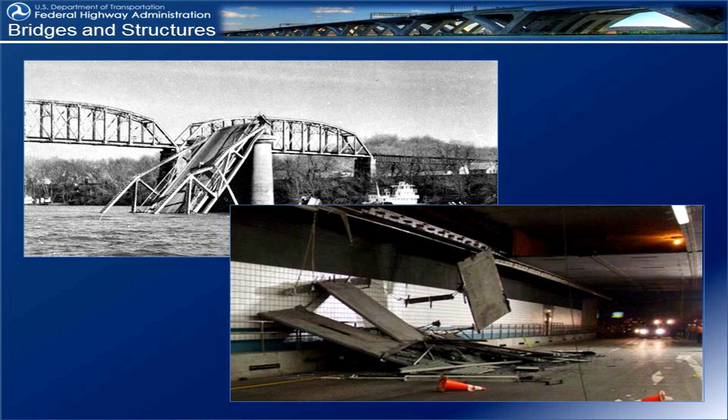But got us here with the bridge and tunnel inspection program Tom talked about: the Silver Bridge, 1967. This bridge collapse happened over the Ohio River. This is what really was the springboard for us to develop a national bridge inspection standards program, national bridge inspection program. But that wasn't the only thing. We tend to learn from our mistakes. We tend to learn from not mistakes, but from our events, things that happen.

1983, Mianus River -- a whole focus on what we call fracture critical today. 1987, bridge in New York, Schoharie Creek. We may hear Dave Henderson talk about that as well, and we talk about scour later today.

But certainly things that do happen, we tend to be very reactionary in how we do things. And part of what I'm going to talk about today is how we can become proactive, get to a little bit more on being proactive. But that was the bridge side. On the tunnel side, we've had those as well. I mean, I know there was an event that probably didn't springboard us into tunnel inspection standards.

But out here on the West Coast, you have the Dennis Edwards Tunnel. 1999, part of the ceiling in that tunnel collapsed, killed Dennis Edwards, who that tunnel was named after a few years later. But what really got us to where we are today with tunnel inspection, and the reaction, was certainly what happened in Boston in 2006 with that tunnel ceiling failure. And unfortunately, individuals died in that event as well.

But these are things in our past that help us move forward. These are the events that led us here today to where we are in doing this. We've been doing bridge inspection for over 45 years. It was the early 70s when the first national program was put together. And it's still going on today, and we're still learning as we move forward. Are we complete with all the challenges that affect bridge inspection? Absolutely not. And I'm going to focus on the challenges that still lie ahead of us.

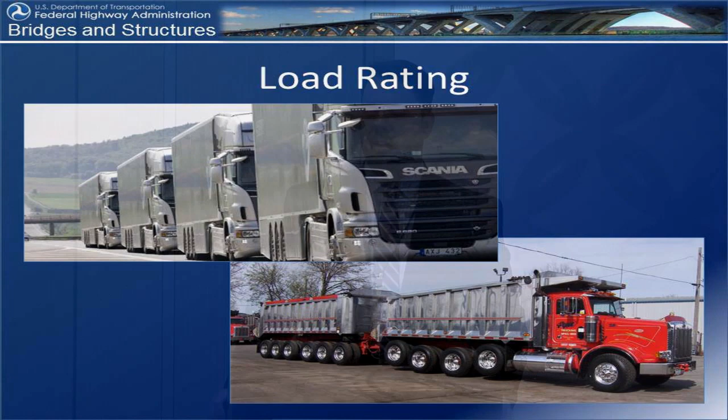But with vehicle-to-vehicle infrastructure technology coming, these vehicles are going to be able to communicate with each other, and they're going to be like cars running around on a NASCAR track, racing around an oval. Are we prepared that an 80,000-pound vehicle now is 320,000 pounds on the bridge all at one time, with another 320,000 pounds right in the adjacent lane, and another 320,000 pounds in that adjacent lane?

I was at a freight conference in Philadelphia back in the fall, and I raised this question: have you considered what this is going to do to the infrastructure, and can the infrastructure handle it? I'm biased towards bridges and tunnels, yes, but I was also speaking on pavements. And the person leading the conference said, no, we never even considered it. We're not considering it.

The rest of the industry takes it for granted that our bridges are safe because we keep them open. Safe bridges are open, unsafe bridges are closed. I agree, exactly Tom, it's what we say all the time.

But we're going to start putting loads on these bridges. Are they going to remain open? Are we going to start load posting more of them and preventing this from happening? I know there's been a lot going on in the last year and a half ever since the FAST Act passed. Congress put 2 vehicles in particular in the FAST Act that are causing us challenges.

One, I know a lot of states have been engaged in - my office asked you to develop a plan on how you're going to load rate emergency vehicles. These aren't heavy vehicles, much heavier than you're dealing with, but they are compact, and they have some pretty heavy axle weights that on a small bridge in particular are going to be very challenging, with 86,000-pound emergency vehicles driving around with the weights that are in law.

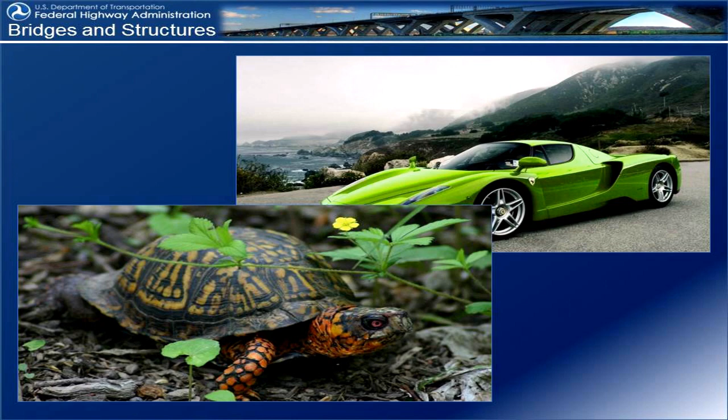Technology is going to come at us whether we want it to or not. And as government agencies, we tend to be the turtle. We are not quick to react to allow technology to help us. And I'll take responsibility with that as well, I'm looking at myself when I say that. A lot of the technology I talked about when it comes with drones, structural health monitoring, NDE, is this all stuff we can easily change the National Bridge Inspection Standards to make it acceptable? It's not. We don't operate like the Ferrari all the time. Unfortunately, we do have bureaucracy that gets in our way.

We tend to be the turtle that's trying to get run over by the Ferrari. Sometimes the best thing we can do is jump on board the Ferrari and go for the ride. These are conversations we have to try and figure out how to make this work.

I think drones are great, and they're going to be an excellent resource for us. Are they going to replace a hands-on required inspection of a fracture critical member tomorrow? No. Unfortunately, we have a regulation that requires an inspector with their eyes to be within an arm's length of that member to look at it. It takes a rulemaking process to overcome that, and that is not easy. It's not even getting easier. It's becoming harder.

But it's something we need to do and explore with the opportunities we have. What we can do, and what my agency can do with policy, we will do to help some of these technologies be used effectively. Can we do it today? Drones, yes. I think drones can supplement your bridge inspection program, your tunnel inspection program today. NDE, we talk about it all the time for in-depth inspections, but if you wanted to use it to supplement your routine inspections, go right ahead. We'd have nothing to stop you from doing that, and I think it would be a great asset.

Which brings us to the third one: structurally deficient. My gosh, the bridge is falling down, it's structurally deficient! We can't get rid of this one that easy. Congress put this right into law. The term lives there and will live there until Congress takes it out of law.

But we can move away from it. When you talk about structurally deficient, and I've heard people talking about it today, what are you talking about? You're talking about the condition of the bridge, primarily. There's two elements that I understand go in there as well. Less than 0.1% of the deck area on the national highway system is structurally deficient because of something other than condition.

It's essentially equal: a bridge that's in poor or worse condition is structurally deficient. We can just start talking about the condition of the bridge today. You have the data, we have the data. These bridges are poor or worse.

I'm not going to talk about performance management, some of those things are coming. We've extended the effective date of that rulemaking till May. We can come back next year and talk about performance management if you'd like. But they're becoming synonymous. A bridge that's poor, was structurally deficient, is poor. And I think we're going to be able to get there eventually.

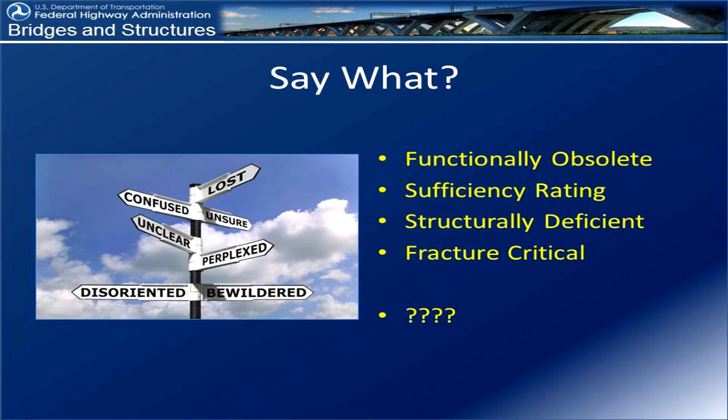Then I've got one more. I talked about it earlier. Another one would be tough to get rid of: fracture critical. Another thing that we think the sky is falling over. That bridge is fracture critical, let's not build it, we've got to replace it.

It's fracture critical. I've even seen proposals from Congress with a plan for a bridge program to replace fracture critical bridges. Tom, is that your priority, to go out and replace all the fracture critical bridges in your inventory, especially the ones in good condition? How many billions are you going to give us? We're just going to tell you to do it without giving you any money. That's the way we do it, right? Sorry.

I don't think it's going to go anywhere, but this is some of the language we grasp onto. These are things that permeate our industry. I talked about being the turtle - it's right in the NBIS regulations. It's not going to be easy to get out of, but these are an opportunity for us to figure out what to do.

What is a fracture critical member? It's a non-redundant steel tension member - that's a mouthful, yeah, probably. What about all those non-redundant concrete members? Do we do anything special for those? A single concrete column could fail and a bridge would fall down. It's not required to do anything special with those. Why not?

Because we don't call them fracture critical? And we don't call them fracture critical because they're not made of steel, and they're in compression. The whole thing is wrong.

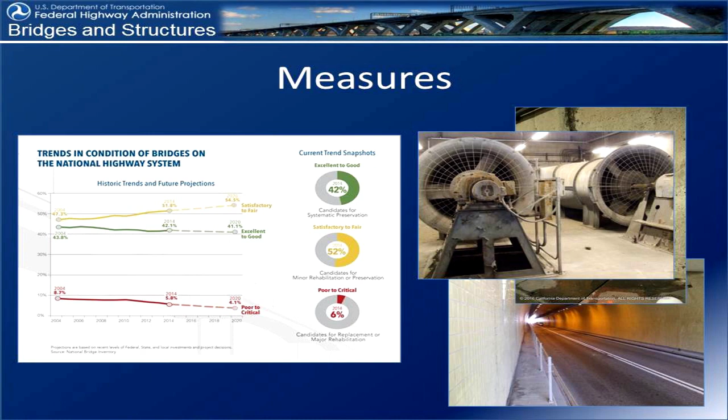We've got ventilation systems. Harvey talked about it earlier. We've got electrical systems, mechanical systems, pumping systems. How are we describing the condition of these tunnels? What's going on your dashboard? So you can tell the public, like you do today with bridges. This isn't easy.

Moving towards element level inspection, which we've been doing on bridges and we're starting on tunnels, becomes a challenge to wrap up in a nice bow a singular answer for what the condition of our bridges and tunnels are. So this becomes a challenge for us as an industry as well.

How are we going to communicate to the public, to your stakeholders, what the condition of our tunnels are? Moving forward as we use element level inspection more, how are we going to wrap up a bridge that has 30 different elements in one of four multiple condition states and different quantities in condition states, to wrap it up in a nice bow and say that bridge is poor, that needs to be replaced, that tunnel needs to be replaced? It becomes a challenge for us, and I think this is where we can work together to try and figure out how we can figure that out, because it's not going to be an easy thing to do.

Last, let me kind of end with some tunnel factoids, and I'm going to come back to wrap things up.

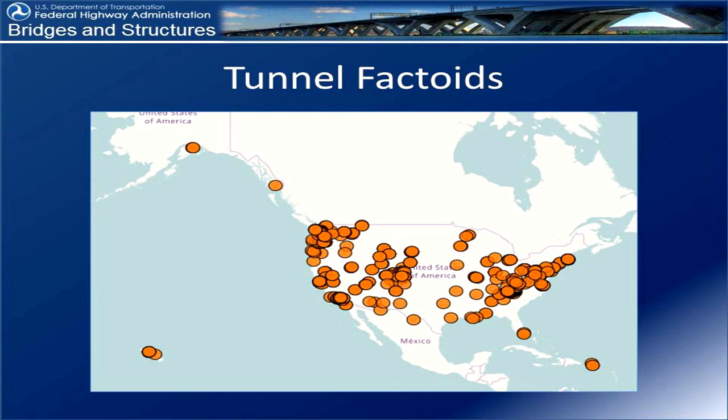But to take the title from California, the National Park Service owns the most tunnels, more than Caltrans. A federal government agency owns the most tunnels, is going to be the most impacted agency in the country. 63 tunnels owned by the National Park Service in multiple states, several in California.

Tom talking about the age of bridges, getting older. Interesting to see that, we developed a program a year and a half ago. We thought all these tunnels were brand new. Who knew they were so old? Average age of the tunnels of the 473 we collected is 59 years old. The average year built, 1958.

Oldest tunnel in West Virginia, built in 1882. It's probably in good condition. Just guessing.

Certainly, when you have data, as I talked about, you've got to use it. You've got to use it to your advantage.

So, longest tunnel, congratulations, Alaska. Anton Anderson Tunnel, 13,300 feet long. Also carries a railroad and vehicles at the same time. Well, maybe not at the same time. That would be a problem. Shortest tunnel belongs in Colorado, 11 feet long.

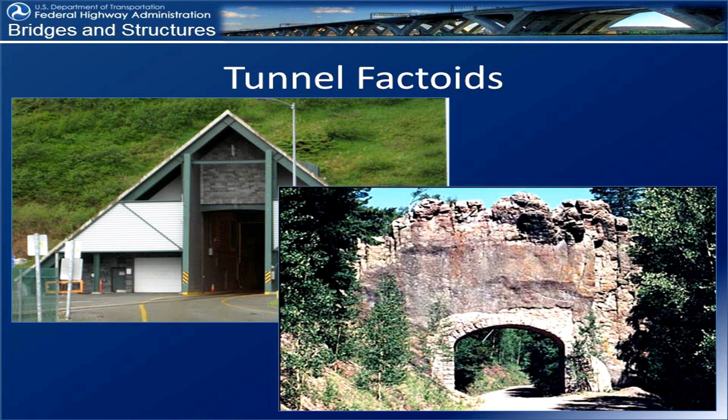Both tunnels are going to have to follow the National Tunnel Inspection Standards. They're going to have a program manager in charge, team leaders with the right qualifications, and they'll have to develop the procedures to inspect both, ensuring some consistency with the National Tunnel Inspection Standards.

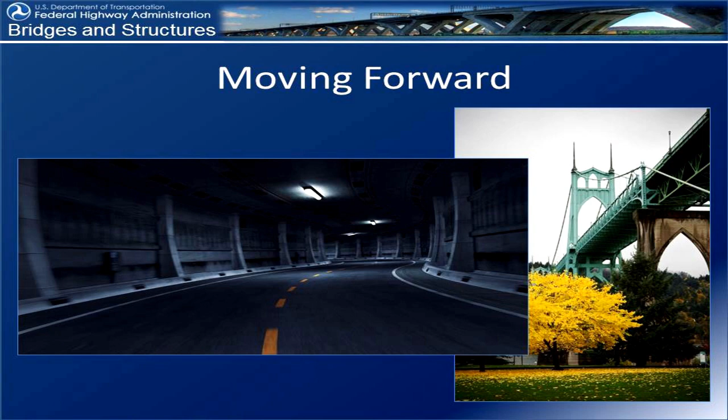We're not short of challenges. But I know we can rise up to the challenge. The big thing is we need to work together with them.

One of the big things I think we need to try and get in the conversation is on freight. We don't think about bridge engineers being involved or structural engineers. I don't want to exclude the tunnel engineers here in the freight conversation. That's a planning thing, don't worry about freight. Freight's going to cause us a problem because they want to move their product as efficiently as possible.

We're going to have that platooning effect going up and down the highway. We're going to be asked to allow heavier and heavier vehicles going on our highways, through our tunnels, over our bridges. It's going to be coming. We need to be prepared. We need to be part of the conversation now.

Technology is also there. Let me raise a hand. How many states have explored the use of drones? How many are using them mainstream? How many consultants are encouraging their customers to use drones?

Don't want to leave the industry out of this, folks. They're there driving with us. We need to be in the Ferrari with them. Otherwise, we're the turtle that gets run over on the highway. We need to embrace the technology that's coming.

And we have to look at the other things we talked about today. These are challenges that are going to be there. They're going to affect our entire industry.